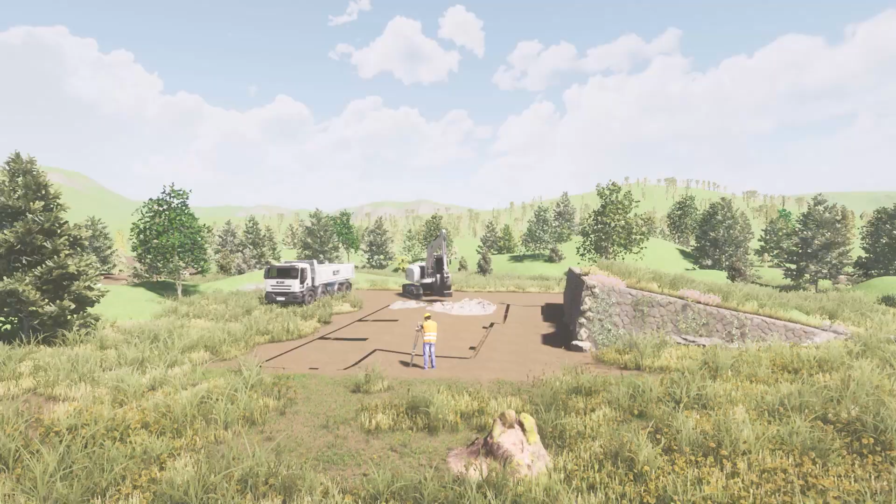Hi, and welcome to our project called The Hill House. We are an international team of 3 students at the Copenhagen School of Design and Technology. In our elective course, we had the objective of developing a selected design brief.

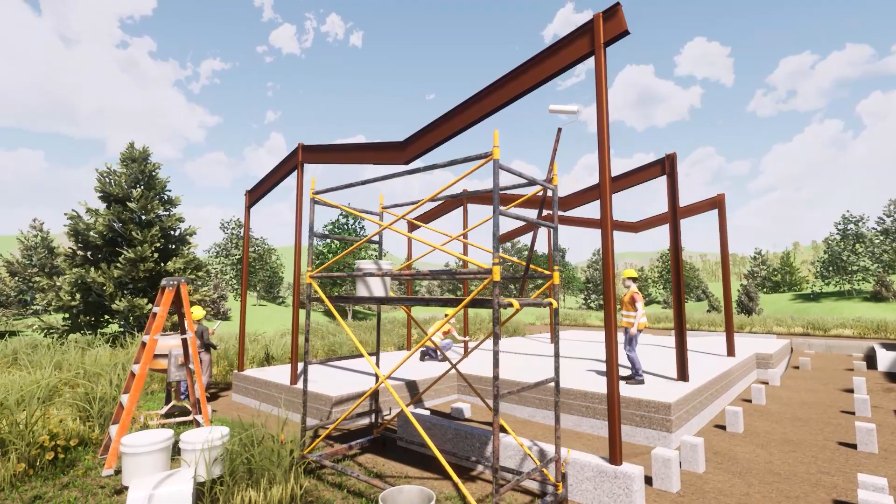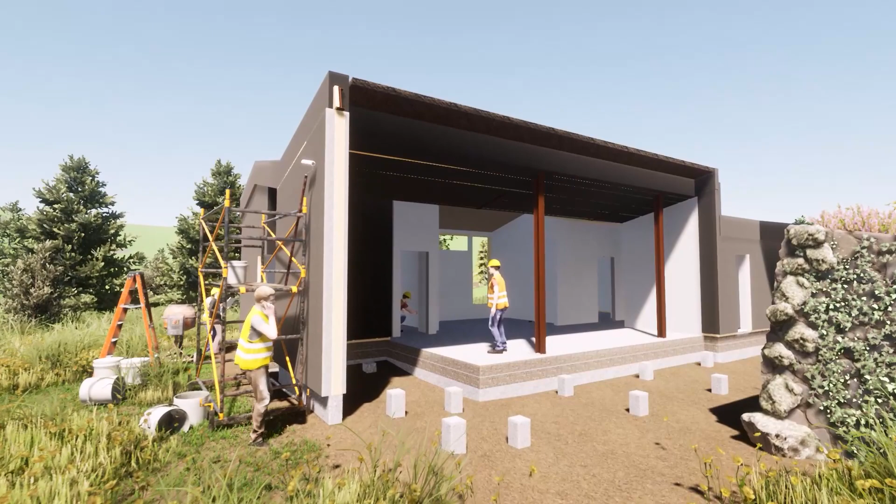The design we chose to develop is a 100 square meter single-family house. The house is in accordance with the Danish building regulations. As a team, we chose a building system that is lightweight and consists of wooden studs and rafters, with a detached load-carrying steel column and beam system.

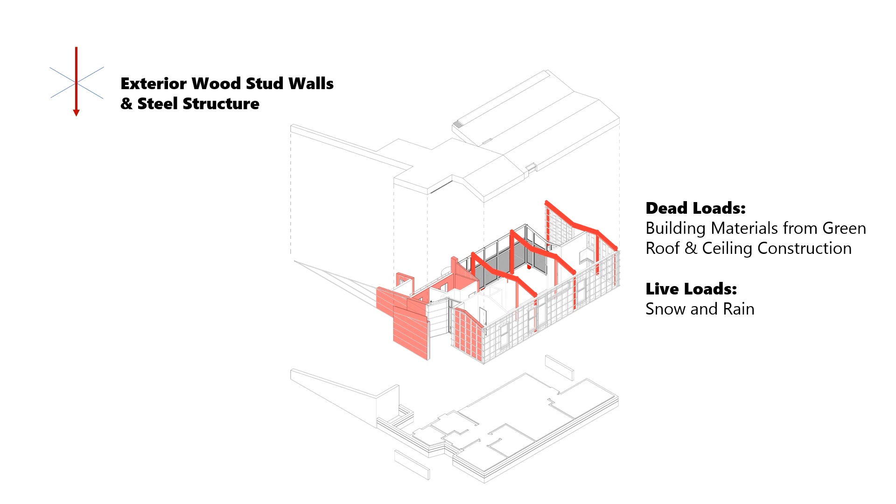To progress with our technical solutions, we tested how vertical and horizontal loads would affect our building. Our reasoning for the steel column and beam system was due to a potential of excess loads on the roof, and to accommodate the open floor plan with a non-bearing glass facade. For lateral loads like wind, the wood stud system serves as shear strength. We did not need to use bracing on the steel structure due to the building scale and wood stud system.

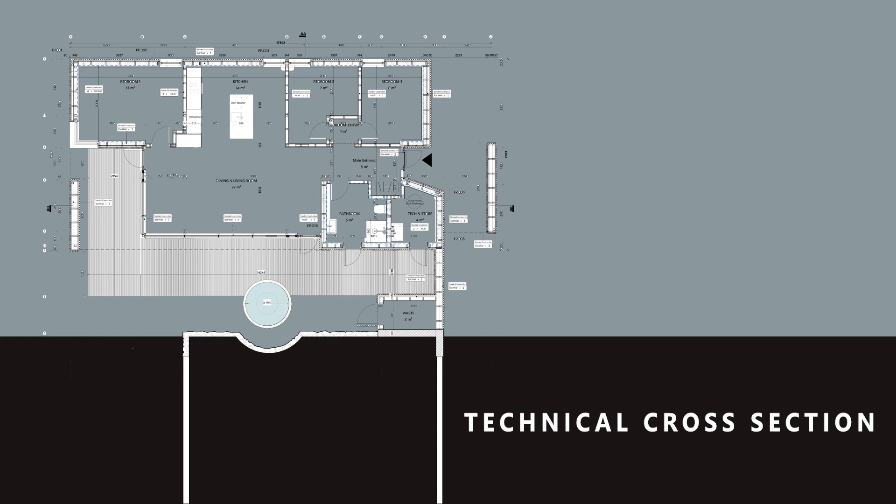We will now show you a technical cross-section and take a look at the standard construction build-ups. First, the most prominent feature of this section, the folded roof. It is an extensive green roof on top of a cold roof construction. We decided to use 2 sets of battens on top of the rafters to allow cross-ventilation, because the architect's design did not include a ridge vent. The ceiling is made from alternating pine strips with a black, sound-dampening backdrop.

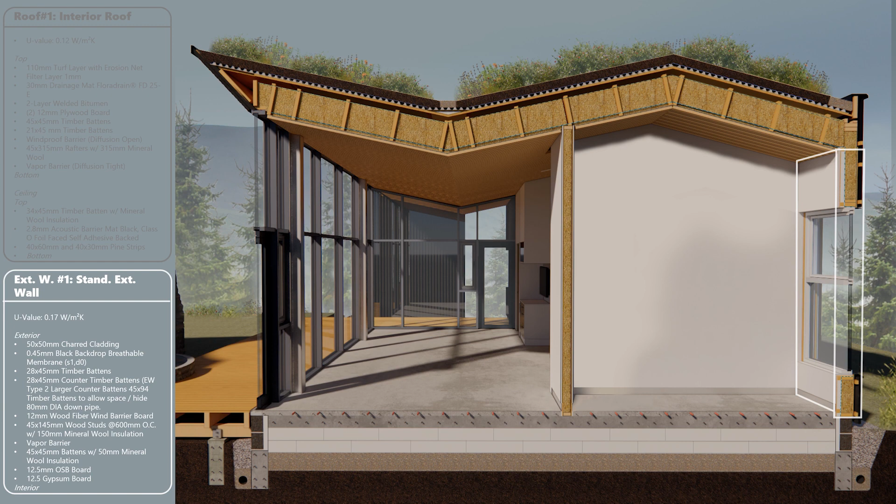For the external walls, we chose a Danish-style wooden stud construction with a total of 200 mm of insulation. The cladding is made with timber strips that were burned at the surfaces to shield it from the elements. Next, the substructure. We chose a strip foundation for lightweight and small buildings. It is made up of 2 lightweight aggregate blocks on top of reinforced concrete and has insulation on the inside to minimize the heat line loss. To prevent frost damage, the concrete is extending 900 mm below the ground level.

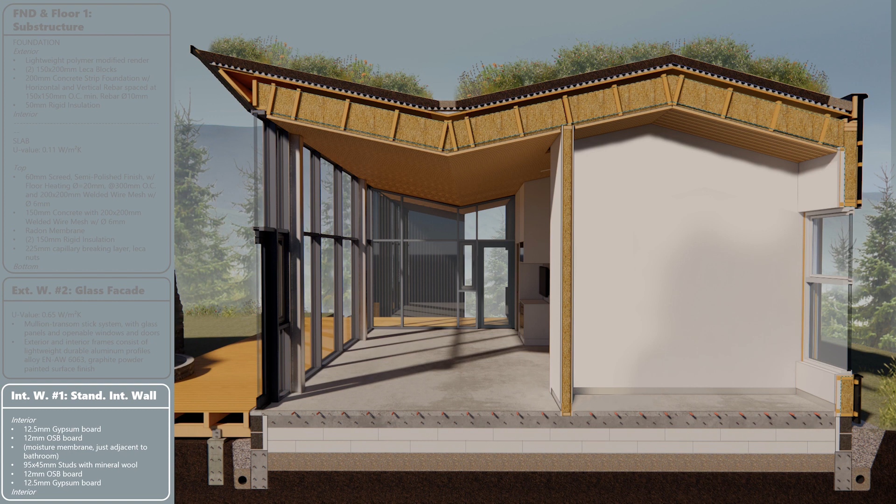For the slab, we decided to go with a standard 150 mm concrete slab to prevent radon gas infiltration from the soil into the building. As the architectural finish, we chose a layer of polished screed with floor heating pipes. If we look at the south side, we can see the glazed facade. It is an aluminium mullion transom stick system with glazed panels and openable windows and doors to ensure natural ventilation and access to the exterior living spaces. Last but not least, we decided on a standard drywall construction on timber studs with a moisture membrane adjacent to the wet rooms for the internal walls.

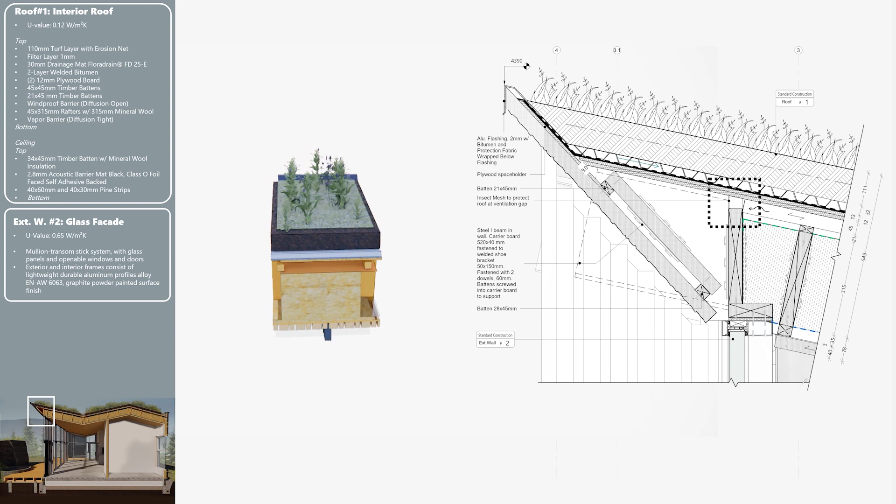This key junction shows the upward sloping eave above the glazed facade on the south side. As this is the highest point of the roof, it is also the main ventilation opening at the cross-ventilating battens. The opening is protected by an insect net and an overhang of the green roof construction. To achieve the cladded overhang, we decided to install an extra rafter with a welded bracket to the steel beam. Battens are then attached to the rafter and the cladding strips are fastened to those battens. An extra piece of plywood holds the green roof construction in place, and an aluminium flashing closes the construction off.

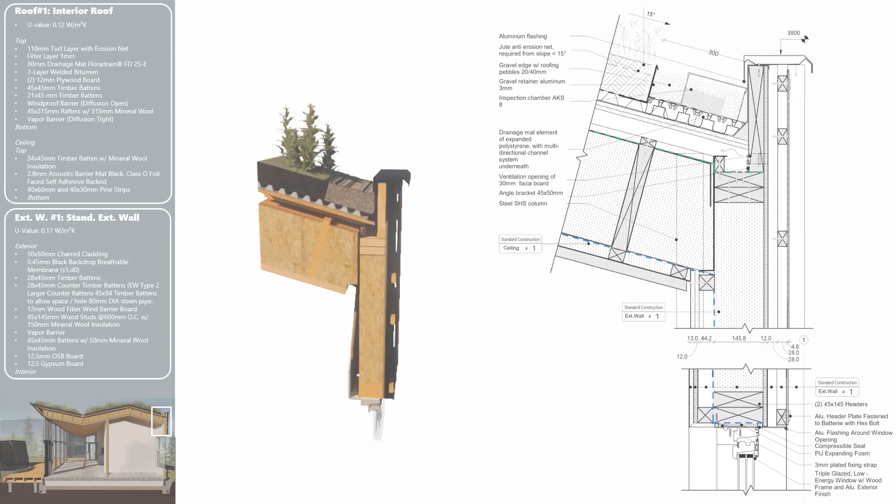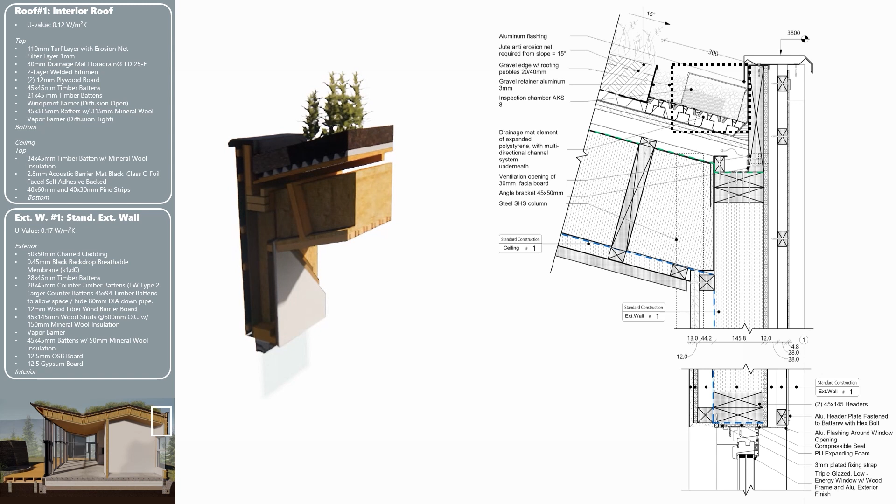Here we can see the north elevation roof eave. To allow adequate water flow to the drain, the soil with planting doesn't come to the edge of the roof. You can notice an inspection chamber made of galvanized and plastic-coated steel used for better drainage. This area is filled with gravel to achieve better access to the inspection chamber and to protect it from unwanted vegetation. To protect the cladding cavity from the rainwater, we decided to use aluminum flashing, which wraps around the eaves of the roof.

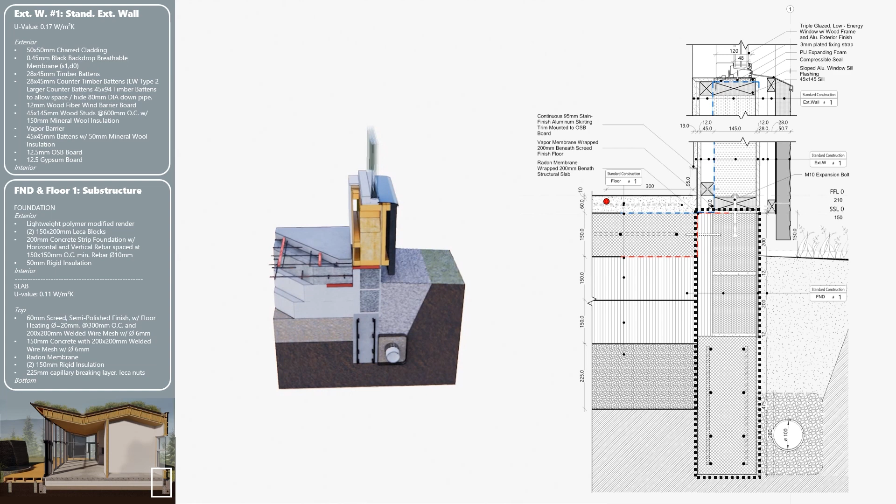As a group, we discussed several solutions. One option for the substructure was a solid strip foundation. Instead, we used expanded clay blocks to save on costs and to reduce the amount of concrete used in our project. The reinforcement of concrete slabs and the strip foundation was determined by using the European design standard Eurocode 2. In the architectural brief, we also noticed that the base of the interior walls had a floating effect. To achieve this, a gap of 95 mm was made from the finished floor. Then an aluminum skirting finish is installed into this gap and is secured onto the OSB board.

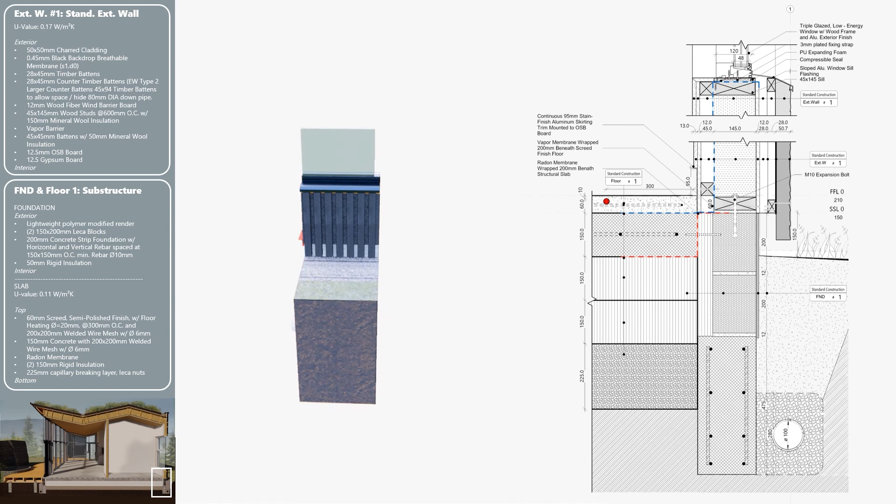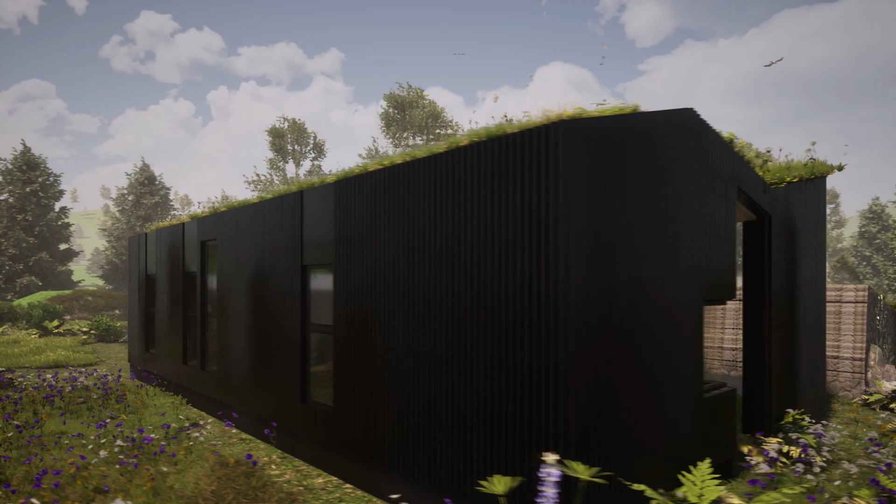The architect's concept for the design was to blend the house with the landscape. The concept embodies a simple and minimalistic design. The wooden cladding refers both to modern architecture and traditional Scandinavian houses. One of the main features of the house is a small hill behind the building. Thanks to that, the Hill House refers to the landscape in a literal way. It also allowed to hide the yard behind the slope and make it more private. The hill, covered with flowers and herbs, becomes a bridge between the wild meadow and the building. This is a perfect way to respect the context of the location.